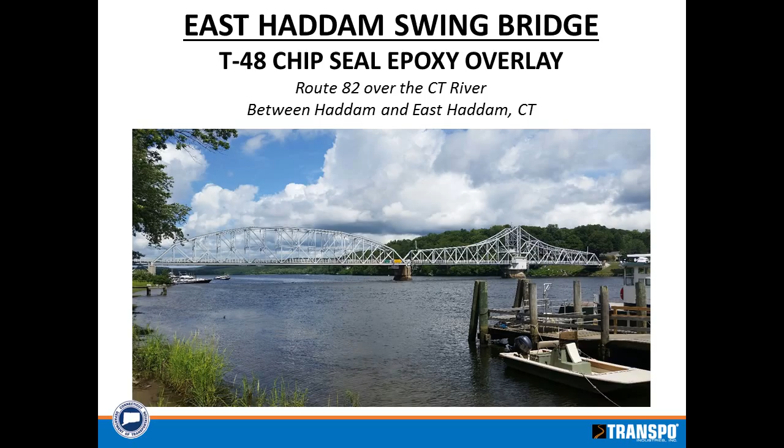The bridge, number 1138 East Haddam Swing Bridge, crosses the Connecticut River between the towns of Haddam and East Haddam, Connecticut. Carries Route 82. In 2012, the ADTs showed that more than 10,700 vehicles traverse this bridge daily. The current bridge opens for local recreational vessels, minor industrial, the occasional barges, and Coast Guard vessels as needed. The busiest times of the years are spring and fall months, where on a typical weekend you can have 10 to 15 openings per day. During the summer weekends, you can have approximately 5 on a Saturday or Sunday.

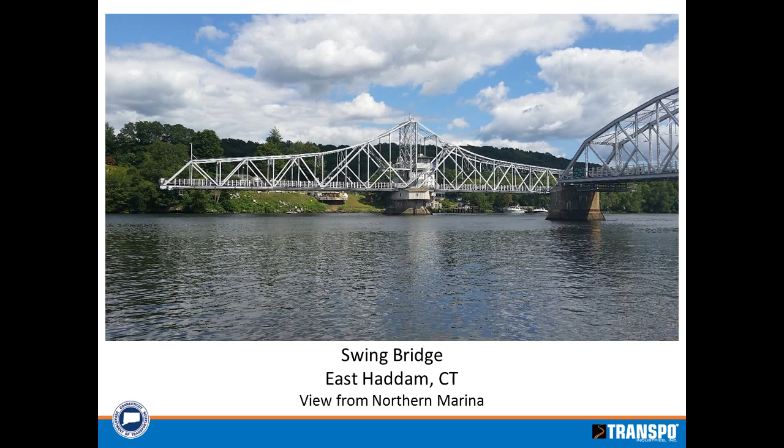The importance of this bridge is that the closest alternative crossings are either 20 miles north between Portland and Middletown, Connecticut, the Arrigoni Bridge, Route 66. Your alternative is to take a ferry that's approximately 5 miles south or continue 15 miles south to the Baldwin Bridge between Old Saybrook and Old Lyme, Connecticut, which carries I-95.

Fortunately, I was able to obtain some of the original construction photos of this project. Give a brief history of it. The engineer responsible for the design was Mr. Alfred Boller. At the time, he was one of America's most well-known engineers and was considered the nation's leading authority in deep foundation engineering. Boller designed several hundred complex bridges, including several large New York City drawbridges, as well as the 1889 railroad bridge crossing the Thames River in New London, Connecticut. Unfortunately, Boller did not get to see the completion of the bridge.

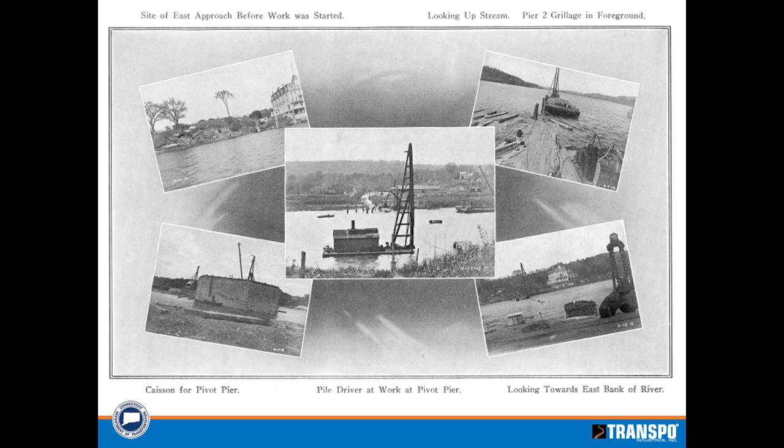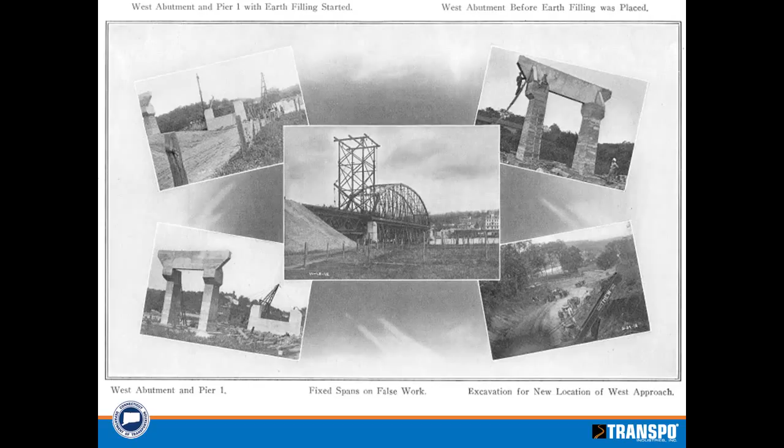Construction was completed prior to opening to traffic on Flag Day, June 14, 1913. The duration of the project was approximately 2 years. It was hailed as the embodiment of the age of progressiveness. It consists of a 461-foot through truss swing span, a 327-foot Pennsylvania truss span, and a 101-foot long fixed deck truss. The 461-foot swing span is one of the largest in the world of its kind to date. The structure contains about 1,300 tons of structural steel, 715 of which are accounted for in the swing span alone.

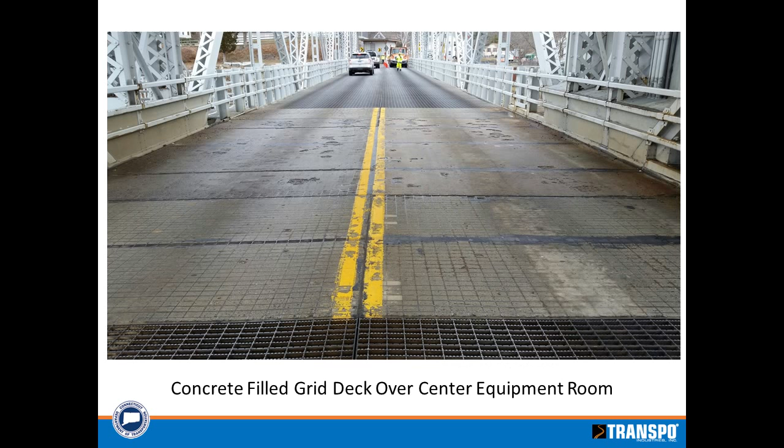There have been multiple rehab projects on this bridge throughout the years, including one in 1987, 1999, and 2007. This bridge requires constant maintenance, due to the extensive use, including weekly greasing, mechanical electrical upkeep, as well as the occasional structural steel repairs. Similar to Steve's issue, the way the bridge was constructed, they had laid an overpour material probably to try to protect the concrete filled grid deck. And as you can see here, quite a bit of spalling and popping was occurring.

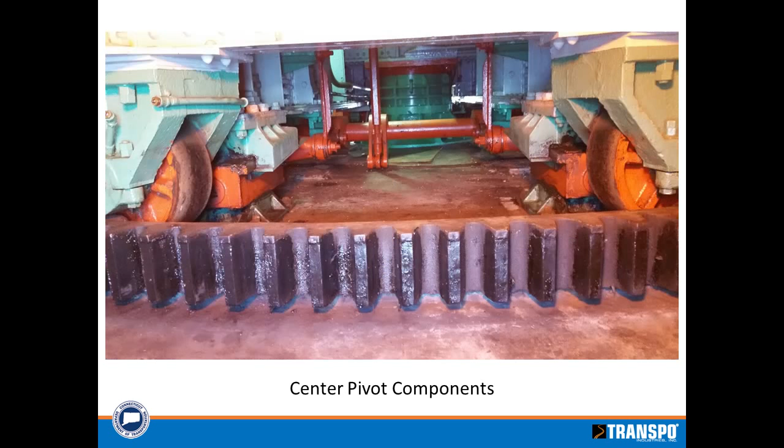Due to this, it was creating leakage through the grid deck that has been exposing our mechanical components to the corrosive chlorides. This picture here shows the center span underneath the area shown in the previous slide. If you look in the back of the picture, that's the center pivot, which when the bridge is open, transfers the majority of the load to the center here. The 2 balancing wheels shown there rotate as the structure moves, and just behind those, there are load-bearing wedges that when the bridge is pulled, it's basically floating.

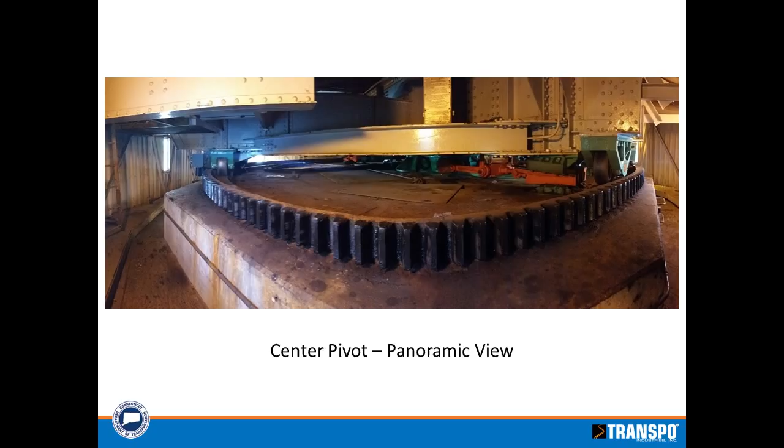I tried to get a panoramic view of the actual mechanical room that's down there. The picture in the previous one was taken just to the right. If you look to the left, there's two Philadelphia drive motors. One's shown on the left, one's directly across from it. As that turns a small gear, it rotates the bridge along the massive pier. Obviously the picture's distorted, but it is a perfect circle.

This picture shows the typical condition of the east and west ends of the structure. Same assembly, same setup as the center. As the wedges are pulled, that center pin is raised, and that typically guides and centers the structure as it's closed. Works simultaneously with the center mechanical components.

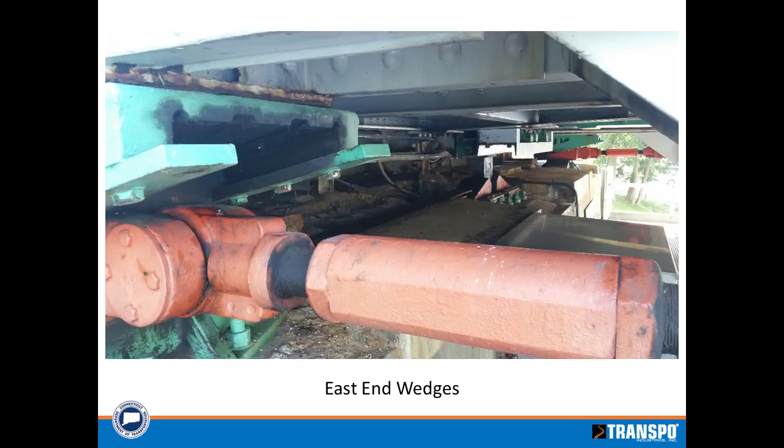This is the issue that we have. That's one of the Philadelphia drive motors. Above it, you can see the condition of the stay-in-place forms. The chlorides have been leaking through the grid deck, deteriorating and exposing our mechanical components to these chlorides.

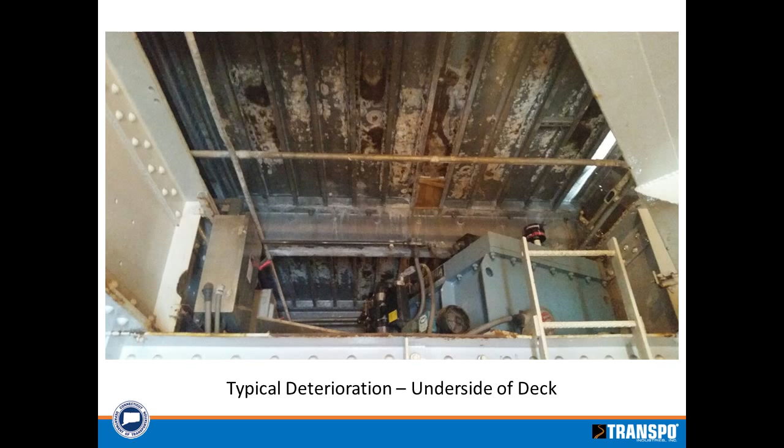We'll begin to get into the preparation. As you can see, the east and west end has a small portion which needed to be addressed above the wedges that I had previously shown. To do so, we used spade bits and chipped off the overpoured materials to try to get as even a surface as possible for the application, while eliminating any future popping that could occur.

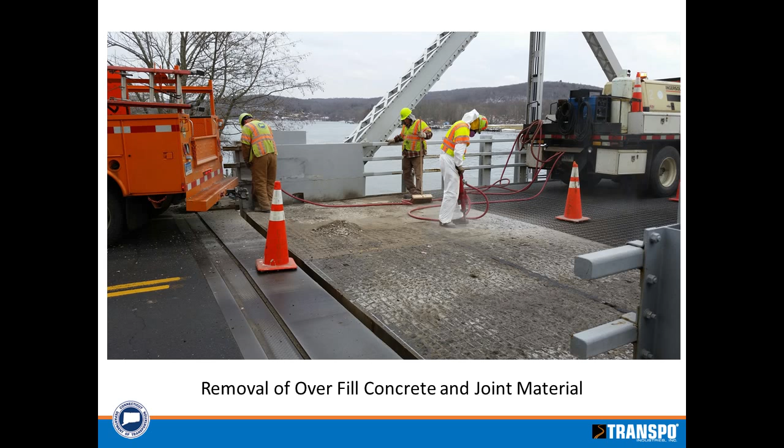Other preparation that was required, as mentioned, we removed all the overpours. We repaired certain sections that were deteriorated and completely spalled by filling with Rapid Set, as we were trying to get in and out of the traffic's way. We welded some of the grid deck seams to try to increase the rigidity between the grid decks, especially over the center pier where there's a lot more movement, in hopes that it wouldn't affect the overlay we were applying.

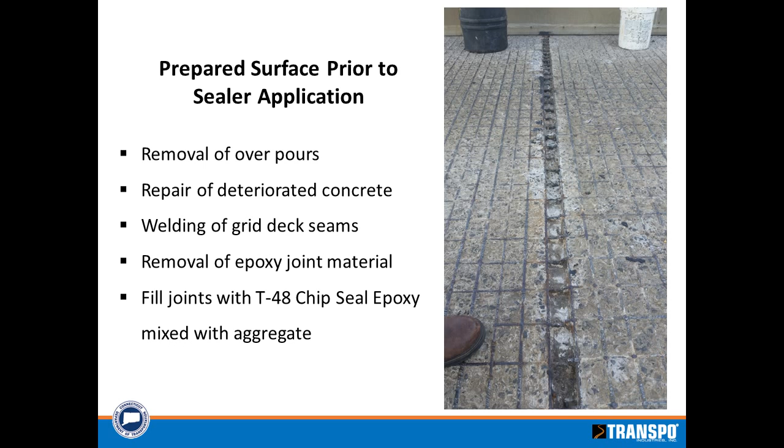We also, as you can see here, had a couple of these joints that were previously filled with an epoxy material. We removed that material and cleaned up the sections, and after discussing with Mike, determined that it would be appropriate to take the chip seal epoxy that we're utilizing and mix it with the overlay so we get a uniform material to fill these joints, which we filled with the mixture of the aggregate and the chip seal. I'd like to give Mike a second here to discuss the material that we utilized for the sealant.

Okay, the first treatment was to fill the cracks between the grid deck and the concrete fill. What we used is a high molecular weight methacrylate. A brief description: these are very low viscosity materials, slightly greater than water. They actually have the ability to flow deeper into cracks than water because of the chemistry built into the products. The hope was to get this material to go down and seal between the grid and the filled concrete and any cracks in the filled concrete, so we could come back and do an overlay afterwards.

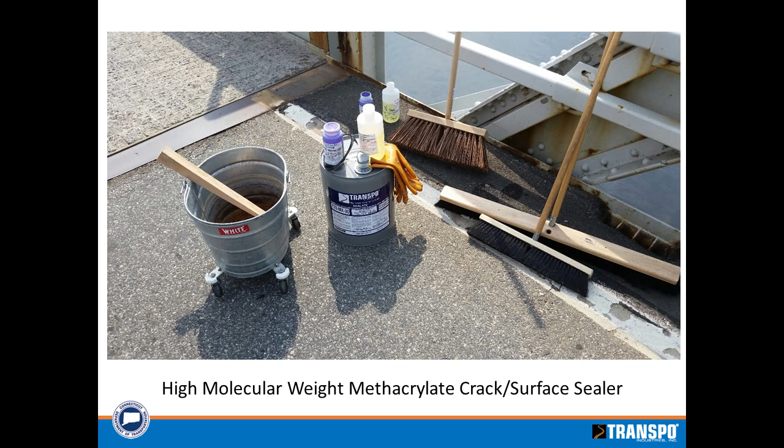Oh, sorry, I didn't realize I had another slide. Again, there were two different products that were considered. Both of these are high molecular weight methacrylates. There's a material that has an elongation of 3 to 5%, and another material with an elongation greater than 30%. We felt that the greater elongation would be more important for this bridge since there was potential for movement. These are slow curing materials, around 4 to 6 hours cure time.

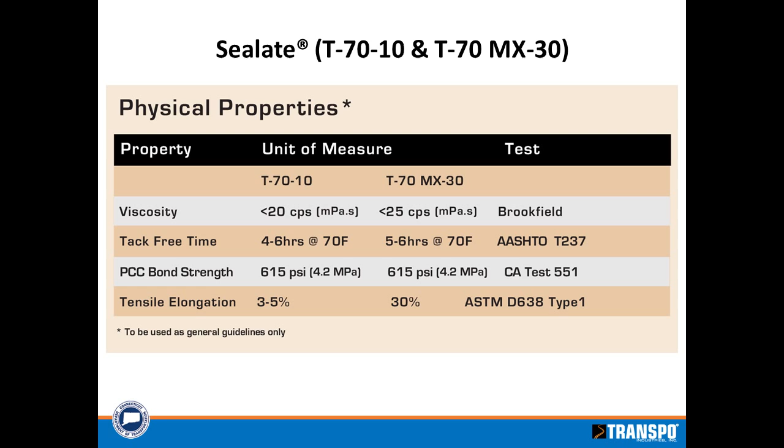They're 3 component materials: a resin with an initiator and a promoter. They're poured onto the deck, they feed via gravity into the cracks, and they have very high bond strength. The bond strength of the material to concrete is actually greater than the tensile strength of concrete, virtually eliminating that crack after you've filled it with high molecular weight methacrylate resin.

The following slides will show the application of the sealant and prep work utilized for the epoxy itself. Typically, a crew of approximately 4 was utilized to mix and apply the sealant following initial cleaning with dry compressed air. This picture shows one of our employees spreading the material while the other is ready to use the broom to spread it. We found the broom method much more suitable, as with a squeegee, the deck had very uneven surfaces and you couldn't spread the material evenly. Using the brush method, we were able to scatter the sealant and prevent excess pooling.

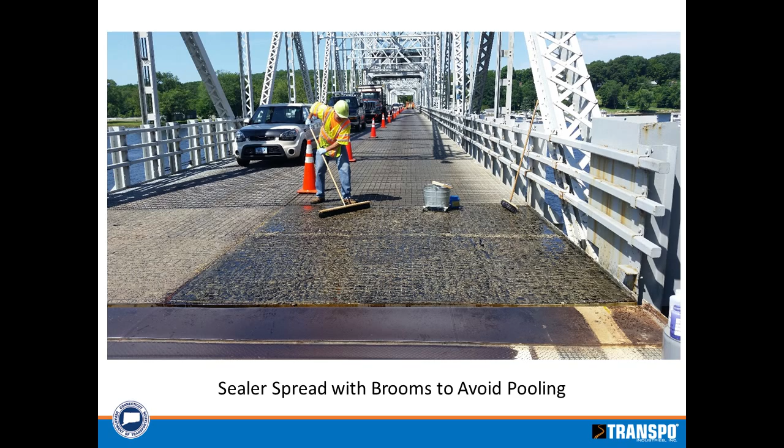Following spreading the sealant, we gave the material a couple hours to cure, as the day we were out there was quite warm. It was a little over 80 degrees, so temperatures were a little greater than what was shown in Mike's slide. A couple hours after, we applied 100% moisture-free silica sand for skid resistance.

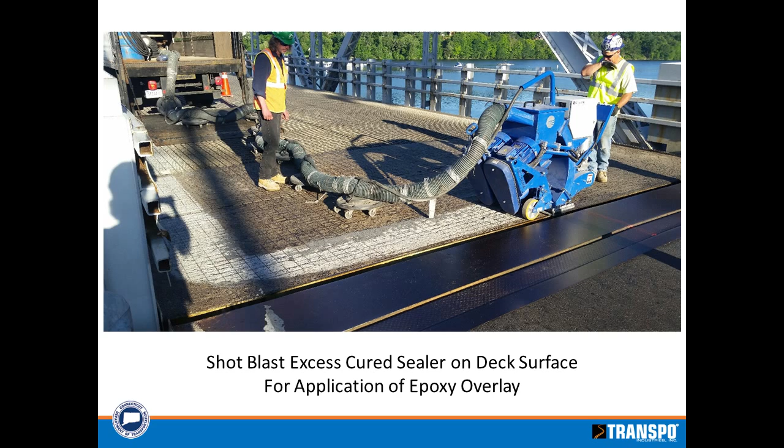Due to the impacts on traffic, the availability of our crews, and awaiting ideal weather conditions, 2 weeks following the application of the sealant, we hired a low-bid shot blast vendor to prep the deck for the chip seal overlay. The shot blast was conducted the same day the chip seal was applied to avoid introducing contaminants to the grid deck from vehicular traffic. The operation went quite quick. He was able to go from one end to the center and to the other end in approximately an hour and a half. The steel grid was brought to near white condition, and any loose concrete was removed by the vacuum shot blast. Following this, the deck was swept and blown clean.

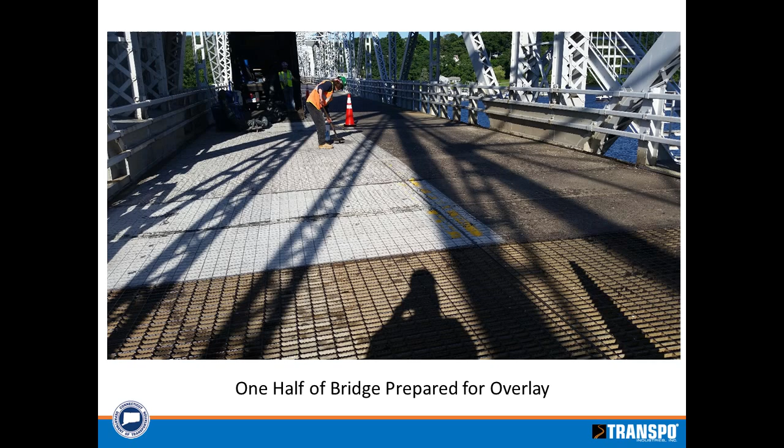I'd like to hand it off to Mike again to discuss the T48 chip seal material. Well, this is a little different than the previous presentation we saw. This is an overlay, basically built up in layers of resin and aggregate. You can build it approximately 3/16 of an inch at a time. It was decided here to do 2 applications of material to build up to about 3/8 of an inch thickness in these areas.

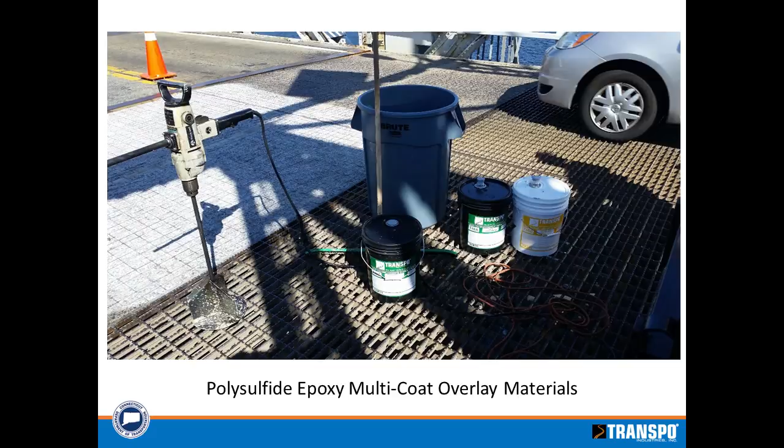So Seth and his crews mixed the polysulfide epoxy resin, which I'll give you some properties of. Again, very good bond strength to concrete, 250 psi or greater. Elongation is a 45% minimum, so it's a very flexible material. Skid resistance is a function of the aggregate that you broadcast. They spread the resin, which Seth will show you in a second, applied the aggregate, waited for it to cure, and then repeated that process until the final thickness was achieved.

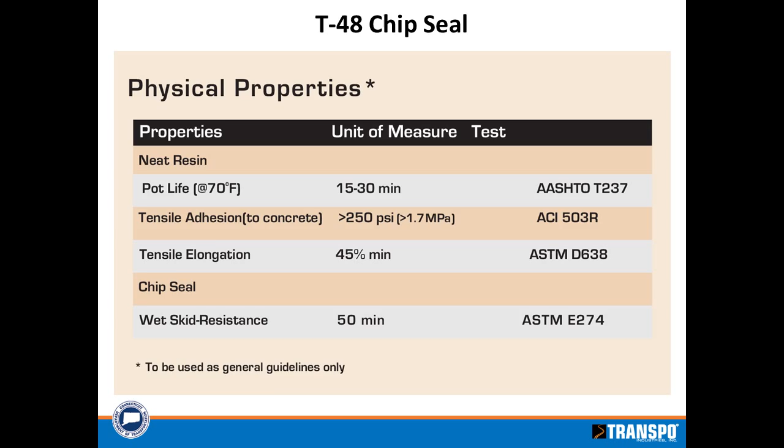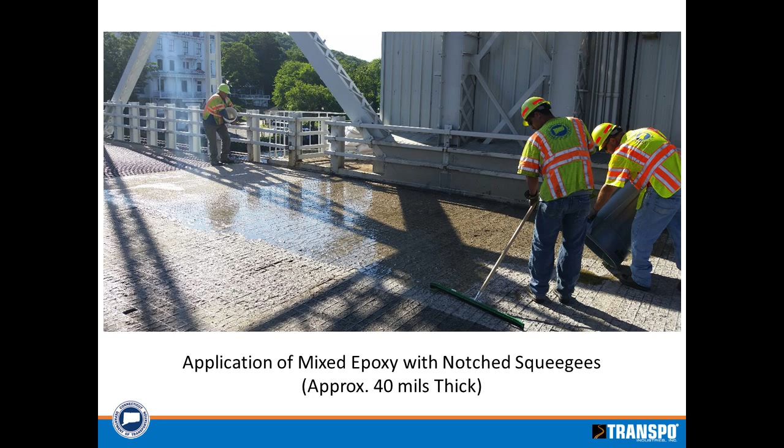Following that shot blasting that was shown, our state crews utilized squeegees to evenly distribute the 2-part epoxy. Started with the brush on this, but brushes ended up absorbing some of the material and it was very difficult to spread. Care was taken to prevent too much material application and try to meet the manufacturer's recommendation on thickness as much as possible and to confine only to the fill grid deck sections.

The application occurred over a 2-day process. First was the south side of the structure, which is in the eastbound direction, and the second is on the north side, shown here, heading in the westbound direction.

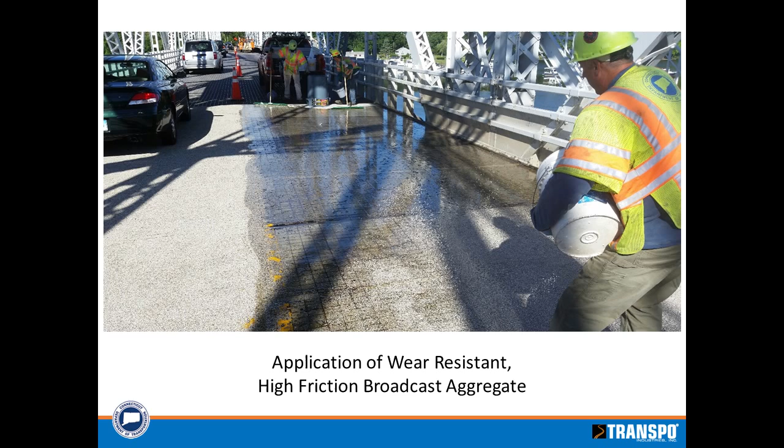Following the epoxy application, aggregate purchased through Transpo was scattered, and the purpose is to induce a skid-resistant wearing surface. In order to achieve a consistent and even application, our resident expert chicken feeder, Mr. Pete Nickerson, scattered with a firm flick of the wrist method, shown in the picture here. Approximately 3 hours following the install, the excess aggregate that did not bond tightly was removed and opened to traffic.

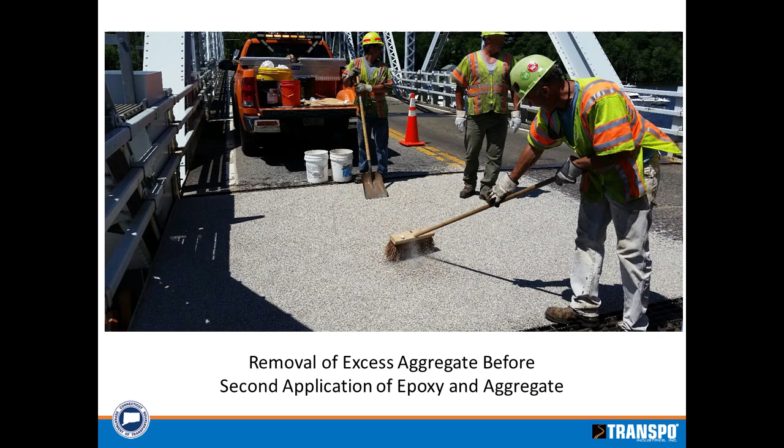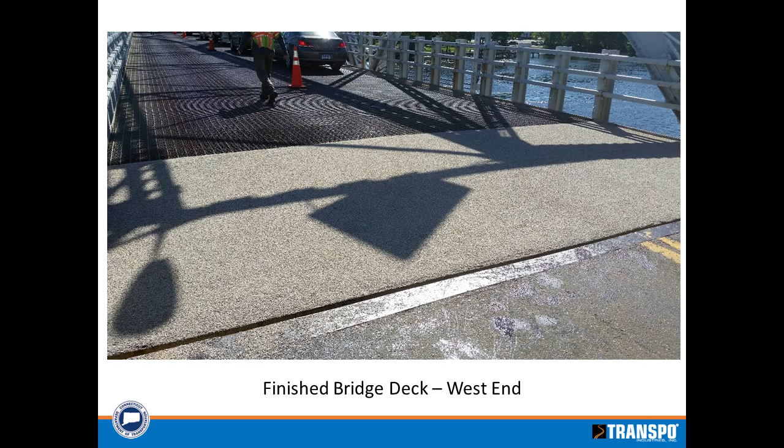The total cost, not including state labor, was less than $20,000. That included the shot blast vendor and all the materials purchased for the application of the sealant and the chip seal epoxy. The original intent was achieved and hopefully prolongs the life of this historic bridge. Any questions?

Steve took the majority of them for us, so that's a plus.

How many square feet did you actually do? About 1,000 square feet. It was about 1,000, just under. So fortunately, it was a small amount, but as stated, we had to deal with traffic, which made it a little bit more difficult for us.

And the prep work we did over about a 1.5-month period between removing the scale, removing any of the poor concrete, we were able, with the availability of our maintenance crews, to fit it in based on weather. And fortunately, we didn't have any bridge openings the days that we were doing it as well, because we would have to pull all the material and all the equipment off the structure. So that was definitely a pro.